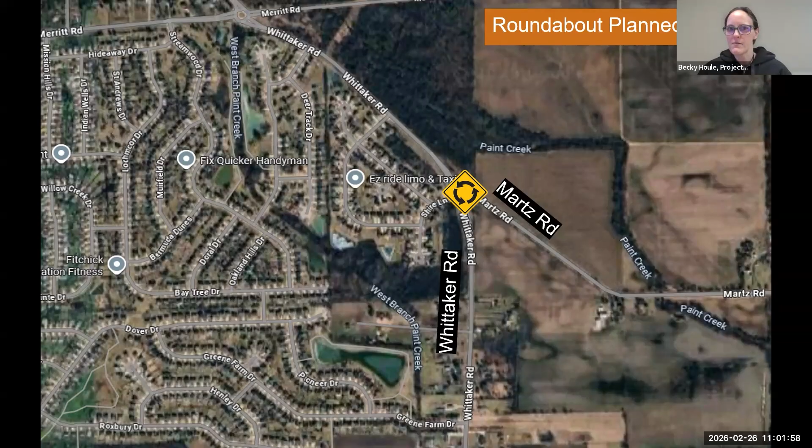This here is the map of the area, and you can see where the little roundabout symbol is. That is the Whittaker and Martz intersection where this roundabout is going to be installed.

It's currently two-way stop controlled, shown in this picture here, where Martz Road and Shire Lane both have to stop for Whittaker.

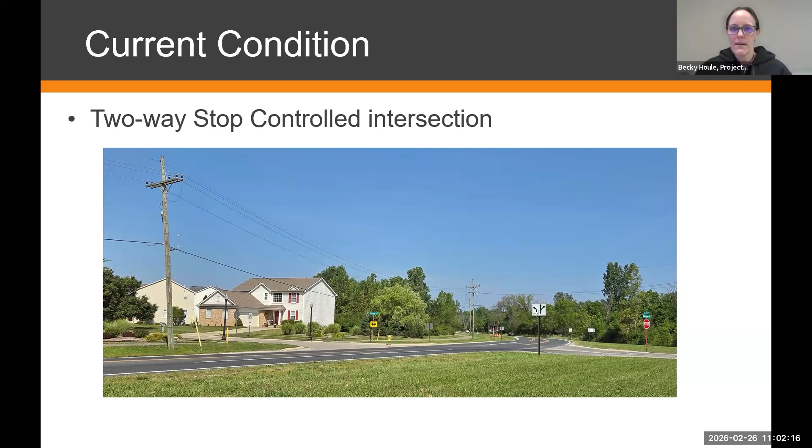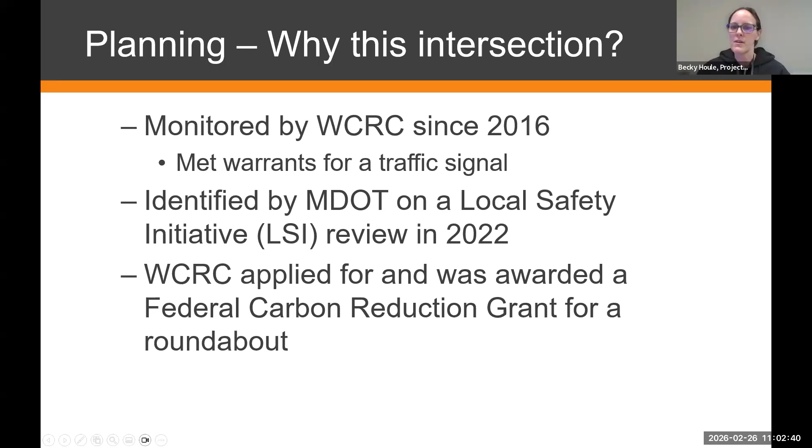So we have been monitoring this intersection since 2016, and it met warrants for a traffic signal. It was also identified on a local safety initiative review by MDOT in 2022. So we explored our different funding options, and we applied for and were awarded a federal carbon reduction grant to install a roundabout at this intersection.

So the funding comes from that carbon reduction program and also the Michigan Transportation Funds, and we estimated the construction to be about $1.3 million.

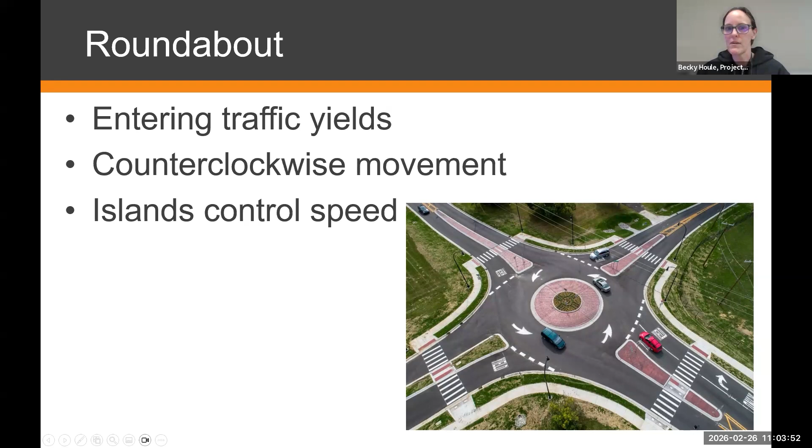So I'm sure most of you should be aware how a roundabout works. There's a lot in the area. As you're approaching the center, all roundabouts must yield - all entering traffic needs to yield to the drivers already in the circle. Everybody goes at a counterclockwise movement, and the islands will help control the speed.

Our schedule did go to the February 6th MDOT bid letting. The as-read low bid was $1.3 million, which was right where we thought it was going to be. And MDOT did award the contract to Fonson Company.

There are some tree removals that are going to need to be removed prior to April 14th. MDOT dictates when trees can be cut on their projects, and April 14th is the date. So you will see the tree removals prior to the intersection being closed, probably. We're not quite sure when the contractor is going to be closing the intersection, but it will be sometime this spring. Once it's closed, it'll stay closed for approximately 10 weeks. And that is, of course, all dependent on the weather.

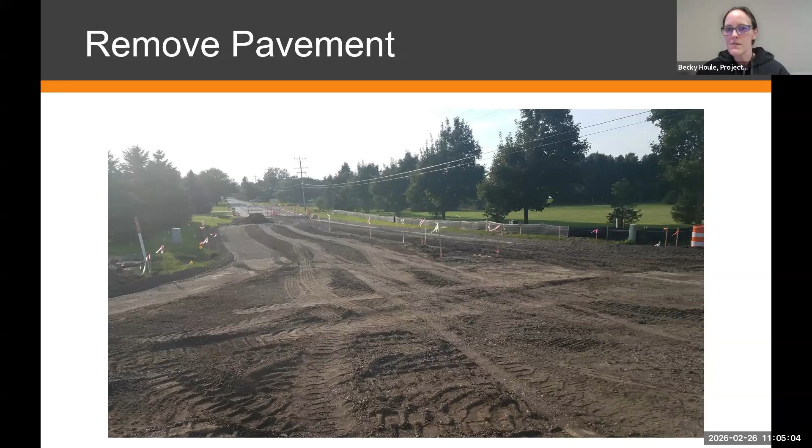These next couple slides are just some pictures showing you what to expect during construction. The first step is we're going to remove all the existing pavement that's out there, so it's just going to be a bunch of dirt.

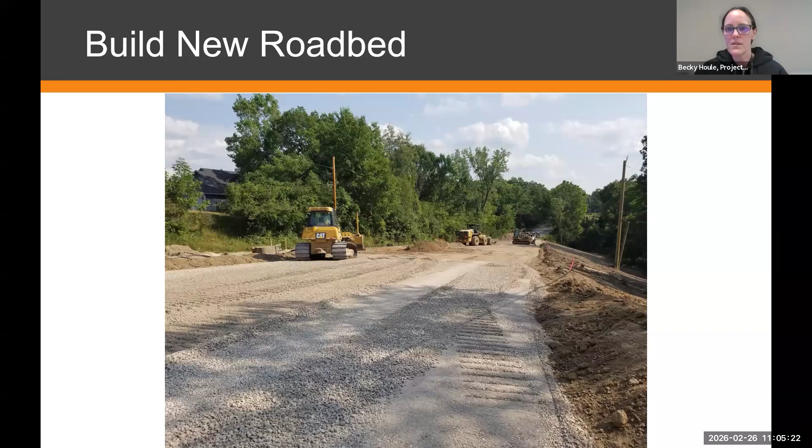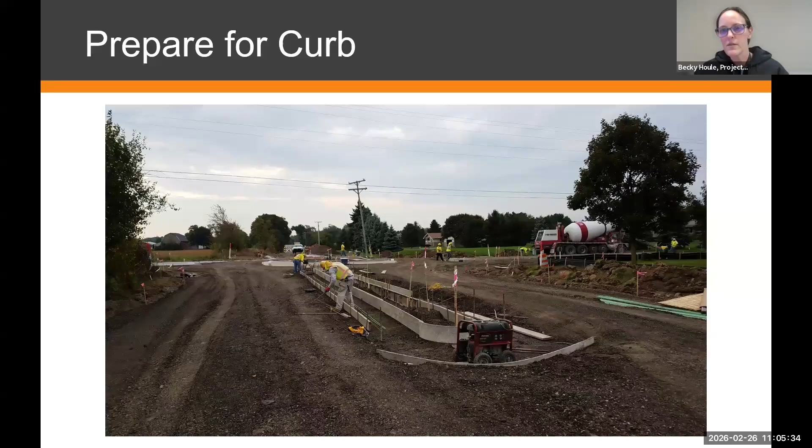Then we're going to build up the base for the new road with the stone, so it'll look like this. And then we're going to grade it out so we can do the next step, which is prepare for the curb and the splitter islands and that center island, and there's also going to be curb around the outside edge of the road. So you'll see forms similar to this in the picture that will go up.

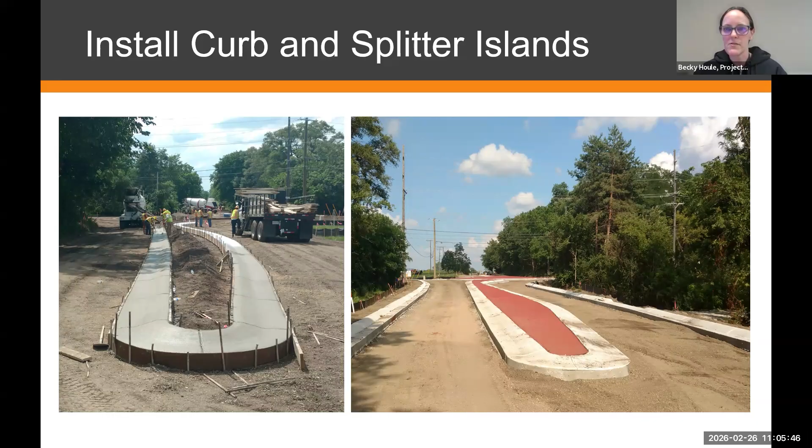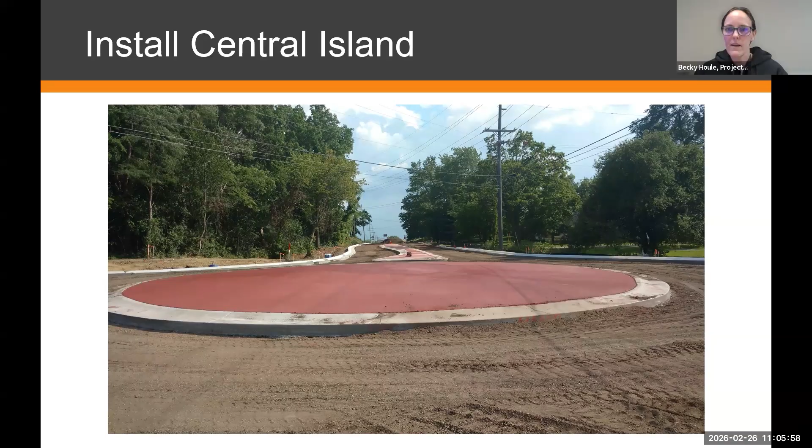The next step is we will install the curb and the splitter islands, so it'll look similar to these pictures here. At the same time, we'll be putting in that central island, similar to this one here. After all the concrete has cured, then we place the asphalt pavement.

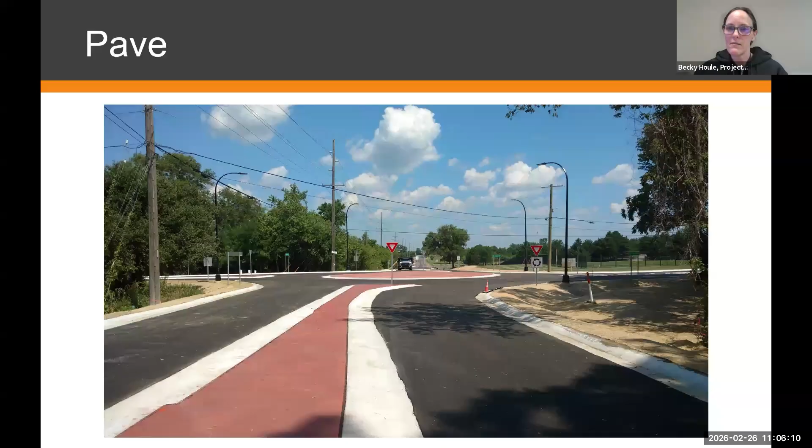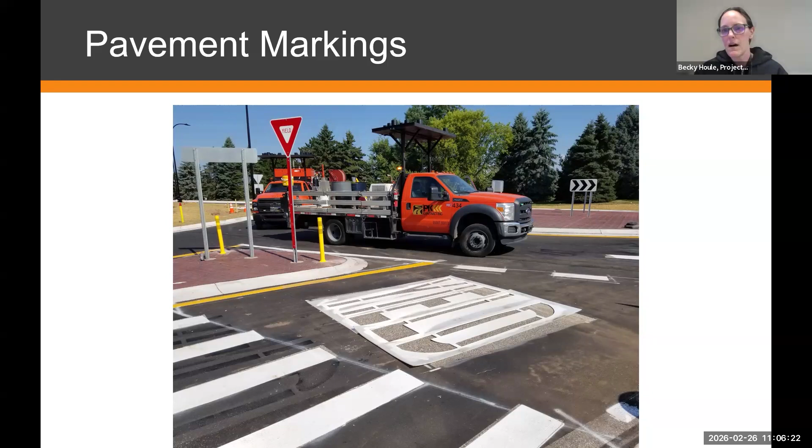Next, we're going to install the pavement markings, which will include a yield sign shown here prior to being placed, as well as arrows in the center of the island, like you can see in this picture. We're also going to install the signs, though they'll look a little different than this picture. The Michigan Manual of Uniform Traffic Control Devices recently updated their details for roundabout signage, so instead of the black and white arrows shown here, it'll be a one-way sign like you've seen on other roads, with a single right arrow that says one way. That's the new standard sign for roundabouts, so I wanted you to know it will look different from the ones currently installed.

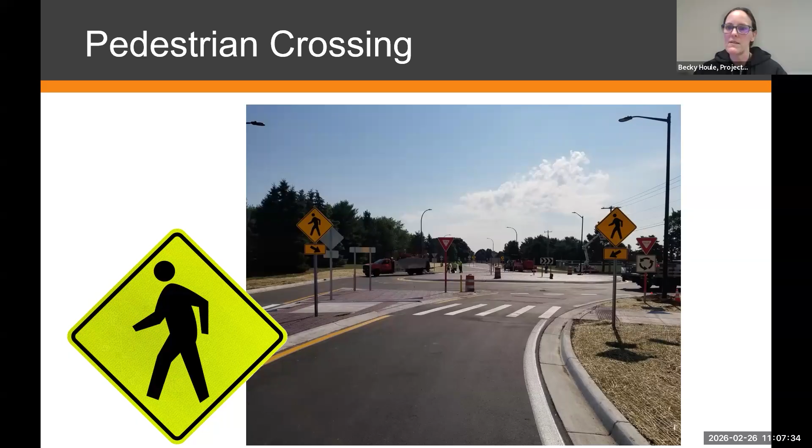Next, there's going to be a pedestrian crossing where we'll place signs and markings crossing Shire Lane, where the path currently crosses. It'll just be more visible now. We're also installing street lighting as part of this project, and you can see in this picture the street lights will be in generally the same type of location.

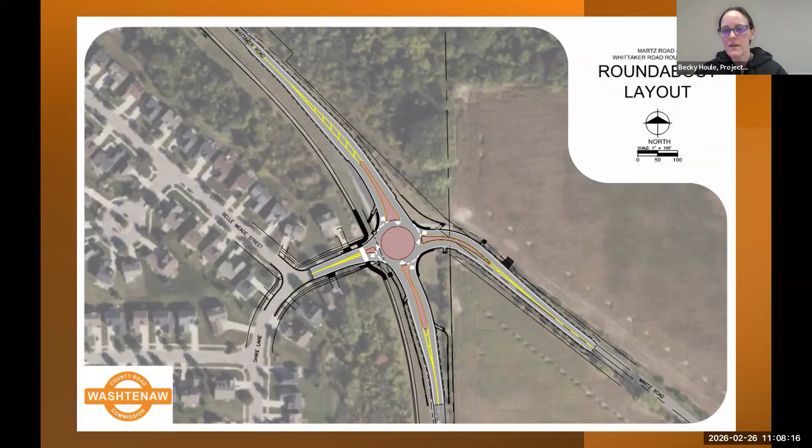Here is a close-up of the intersection, so you can get a better idea of how the path is shifting to the west a little bit. You can see the pavement markings and how they're going to be laid out. It's just a standard roundabout — nothing really special about this one.

The road will be closed during construction, so make sure you do not drive through the construction. There are 3 driveways within the influence of construction — 2 residents on Shire Lane and 1 field drive on Martz Road. Those people will have access to their driveways, but you won't be able to drive through the intersection. To reach your driveway, you'll have to follow a different route and get there from the other side.

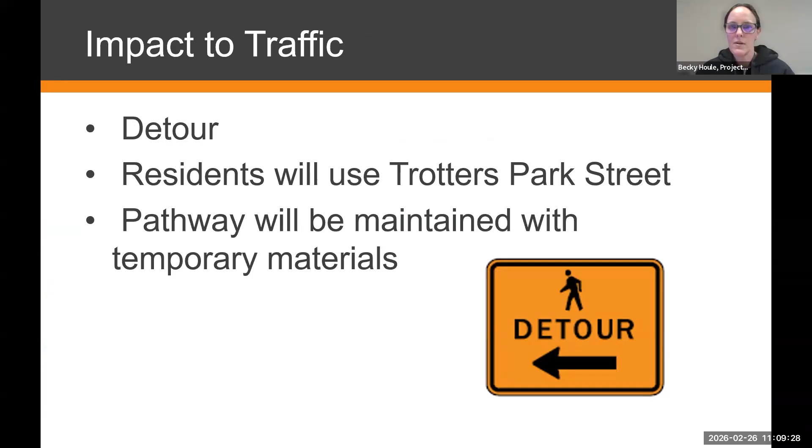I guess that's about it. Some common questions we've gotten that I didn't explain before: once the roundabout is built, farm vehicles will be able to traverse around it. It's going to be similar to all the other roundabouts along Whittaker Road, so there shouldn't be any concern about bigger vehicles making it around the circle.

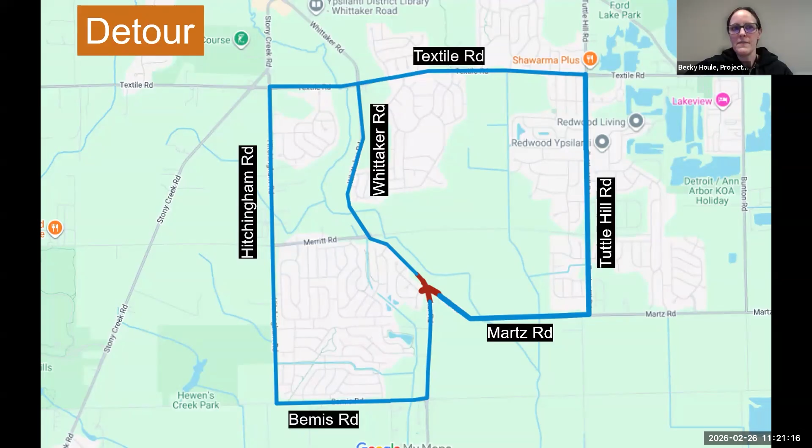Okay, so we're expecting sometime in April for the road to close? Probably, yes. Okay, thank you. Yep. And Mandy, I just want to let you know that the schools are aware, we make sure that the school, police, and fire and everyone is aware of that. Just an FYI for the record here.

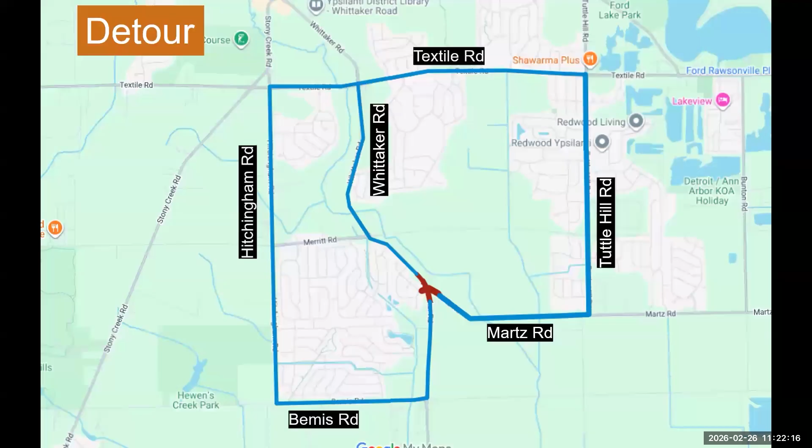You say this roundabout is smaller than the one on Merritt, and it's the same size as the one on Bemis? Yes, it'll be similar to the Bemis Road one. Well, on Bemis Road you have vehicles coming in straight at 90 degrees. This one, like the one coming off of Martz Road, is going to be a little bit further south of straight east, and there are a fair number of trucks that come down Martz Road because, number one, it's an ag area to the southeast of there. And for a truck to make that roundabout and go south on Whittaker, that's going to be a challenge from what I've seen of these roundabouts with semis. And I drive a semi myself. Have you really taken into effect an 80-foot truck going around that roundabout?

Yeah, our designer does do turning movement studies, and we are good with this one. We do evaluate these roundabouts based on the existing traffic, and part of our studies is looking at semi trucks being able to get around these, and it will work. The center island is mountable, and we make it that way for trucks to be able to make the turn. But there should not be any issues with trucks moving around this roundabout.

I understand that, and a truck going around a roundabout empty versus loaded is two different things because of the pressure and stress it puts on the rear axles. The other thing, you make them so you can go around them. I have been at the roundabout at Willis and Whittaker, Stony Creek, and Textile, and I have seen people just drive right straight through, don't bother slowing down. So it's a happy medium, I think, in how you have to design these to slow people down, but yet make it so the trucks can make it around the corner. And I've almost been hit before on these things, so just my comments.

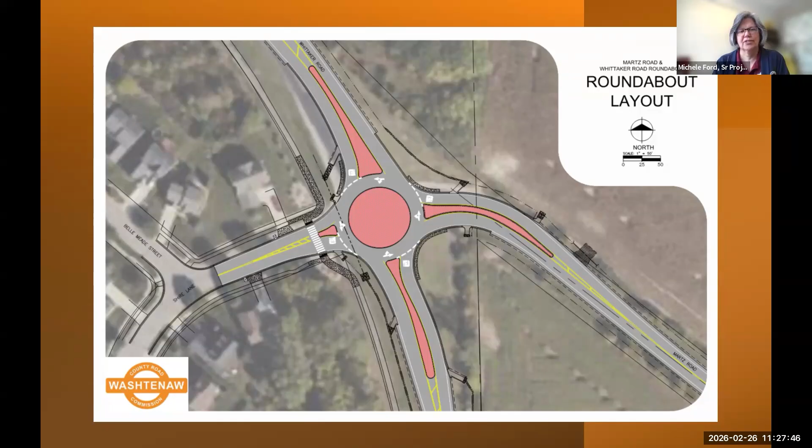I can jump in on that for you, Fred. I do know that we've actually been talking about this particular curve lately because we have seen some strange crashes happening there, so it is one of our focuses. There may be some enhanced signage or maybe some LED lighting on the chevrons, something like that. We're going to take a look and see if there's something we can do. A guardrail would only be if we feel that it's warranted, and we'll have to do a study and look at that, because you have to be careful where you put the guardrail to make sure it doesn't become a greater hazard than not having it there. But rest assured, this is one of the curves that is on our radar, and we'll see if there's anything we can take care of this year.

Well, we do have to be able to get farm equipment in and out of that driveway off of Martz Road, so it gets a little tricky with what you can do too. So, thank you, thank you.